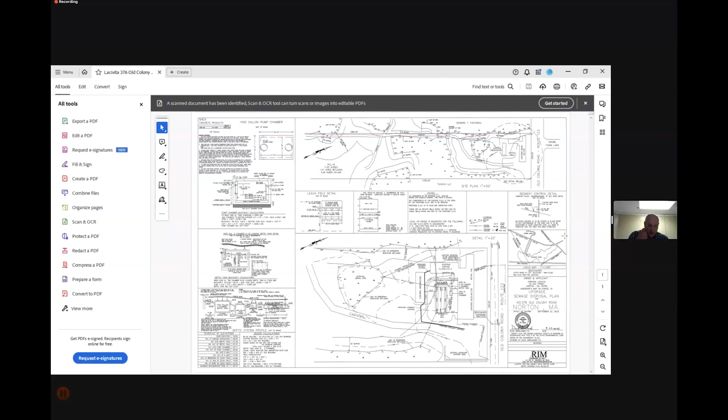I'll zoom into where the existing cesspool is, which is on the westerly side of the existing building. So this is the existing building here, the retail property.

There's a cesspool here with the bordering vegetated wetland on the northwest side, as well as wetlands on the east side, and a potential vernal pool that hasn't been inspected yet but is definitely wetlands at the least. Unfortunately, the building is too close to the road to put a septic system in front.

We have the existing building, an old garage that's still standing, and an existing greenhouse, and we're placing the septic system in between. It keeps us over 50 feet from all wetlands, 68.7 from this one, 70.8, and 102 feet from the potential vernal pool with the leaching area.

It will be a pump system because we did find high groundwater here.

The Board of Health agent has reviewed the plan. He gave me a verbal okay, but I don't believe he's actually approved the plan formally. I have not heard back from him on that, but he has looked it over with me and gave a verbal approval of the location and the design of the system.

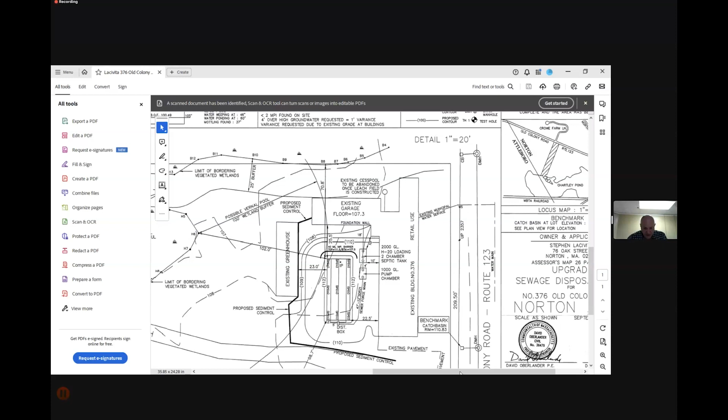That's with, as I said, the high groundwater we found there. The system itself is... trying to find the size of it.

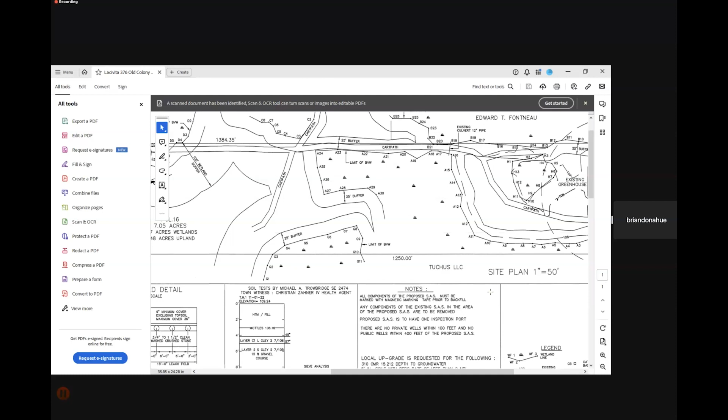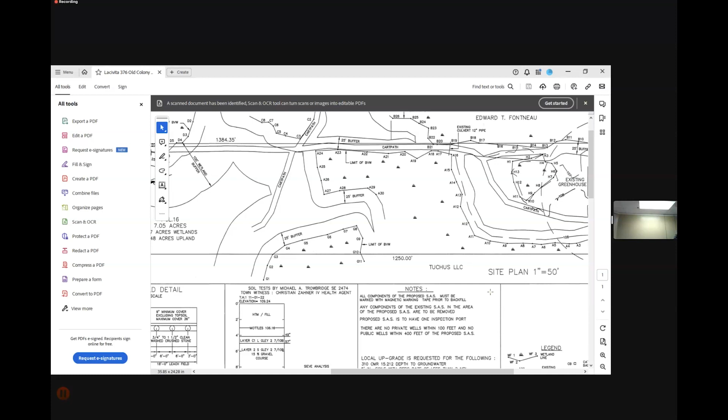So you're raising it up 3 feet, is that what you're doing, Craig? Yeah, over the system, we're raising up 3 feet, then grading down at a 3 to 1 slope. So presumably less than 100 cubic yards, you think? Oh yeah, definitely.

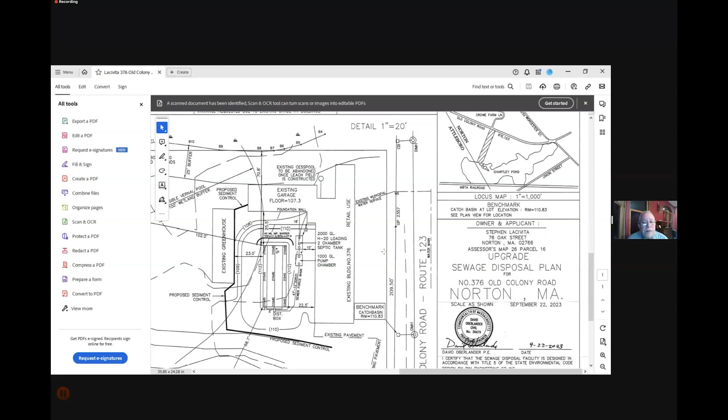Any commission members have any questions? And anyone in the audience have any questions, you can either speak up or press the hand reaction button, or raise your hand.

But this is a pretty straightforward repair, and I don't see any problems with it. Do you have any specific comments, John, or are we all set with this?

No, this is just more administrative. They could have done an emergency repair through the Board of Health, but instead I suggested they come in front of us with this plan. So they've done the process. They've actually gone above and beyond, because this basically would not pass Title V, so they had to do this regardless.

Again, this is Brian Donahue. John has been very cooperative, and I appreciate him and his guidance in staying with the committee. We thought it was best to be transparent with everyone, so you're fully aware of what actions we took with the cesspool versus contained septic tank. Again, I appreciate yourself, John, and the board for hearing us.

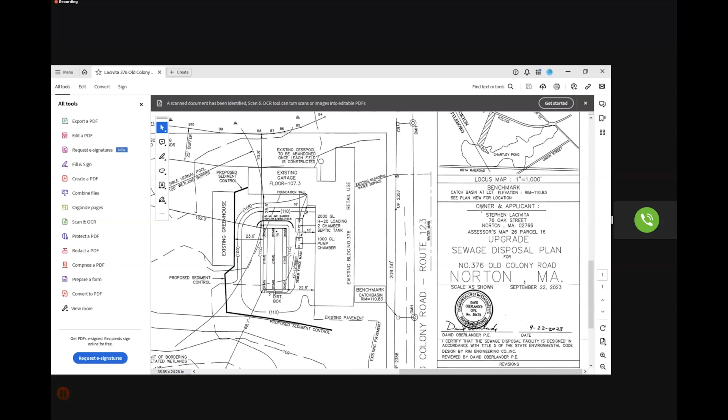Well, this is a pretty common issue in the town of Norton where the water table is frequently high. So I think this is a request for determination. We will likely be issuing a negative determination, which means you proceed with the project. You do not have to file a notice of intent, assuming it's done according to plan.

So I think at this point, unless there are further questions, we can consider a motion to close this public hearing. I would make that motion. Motion made by Tama and seconded by Mark.

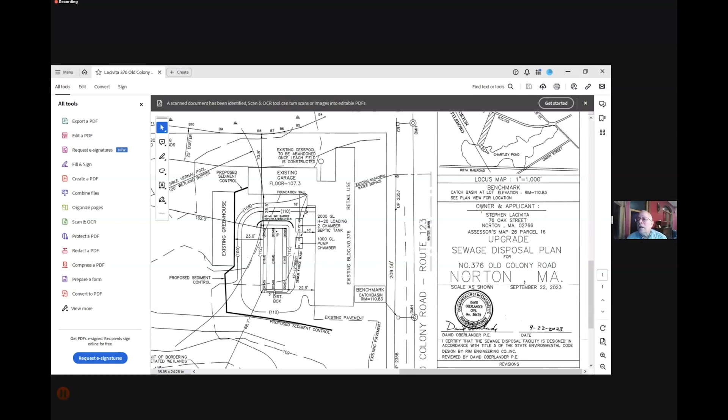Roll call vote. Beginning with Tama and Paxton. Aye. And Mark, and I'll throw in an aye in the process. Aye. And we have Dan. Aye. Got him. All right, so the motion carries.

We also have Ron O'Reilly joining us. So Dan, you can make a note of that in the minutes. Okay, so Ron, did you hear that whole hearing? Oh, I had trouble getting on.

Okay, well, so we won't ask you to throw in a vote, but we now can do a quick vote on the request for determination itself. As I said, this likely can be a negative-3, assuming it's built according to plan.

Do we need a motion for that? I'm happy to do. Okay, we do. I will make that motion. And we'll need a second. Second. We have a motion made by Tama and seconded by Mark for a negative determination.

We will do a roll call vote, starting with Mark and Tama, aye. And Dan and Paxton, yes. Okay, and I'll throw in an aye, so the motion carries. That's a negative determination. Thank you, Craig, and was it Brian? Brian, yes sir, thank you.

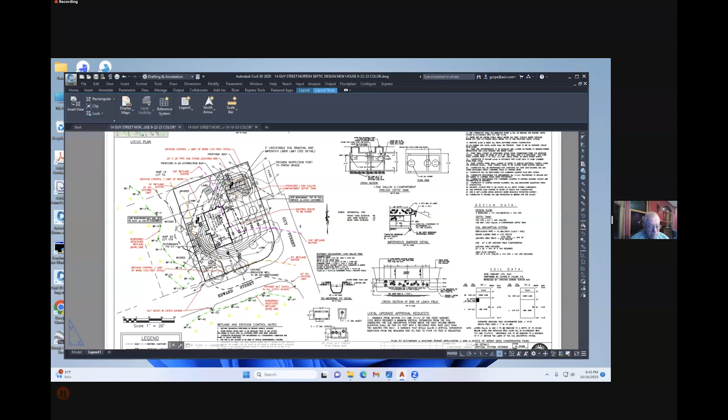All right. And can everybody see the plan? We can. Maybe enlarging it a little would be good. So, this is a demolition and reconstruction

at 14 Guy Street. The existing house is shown as the dashed line. It's a front-to-back split type of house, and it's up on a mound. The water table is fairly close to the surface, and this house being demolished most likely already has water problems in the basement.

We need to keep our new foundation at least 1.5 feet above the observed water elevation. That's what determined the grades on the site, as well as the septic. We have wetlands to the west, mostly created by a low point in Edward Street with these catch basins. We have wetlands to the south across Edward Street, so the 50-foot buffer is shown in orange, and it cuts across like this. The 100-foot buffer is shown in purple or magenta, and it cuts through like this.

What we're proposing is a septic system in the very northeast corner of the site, completely outside the 100-foot buffer. All the components and the septic system itself will be outside the 100-foot buffer. You can see it's kind of a raised system. We have an elevation of 54 here, and an elevation of 51 at the street, so it will be a raised elevation due to the water tables.

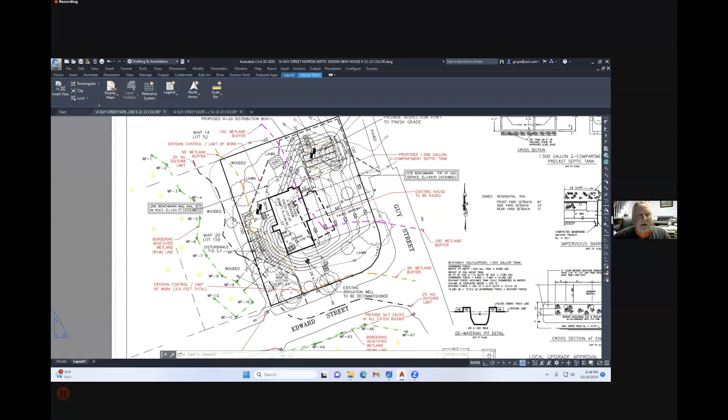Now, I don't show the elevation of the existing house, but it was at elevation 55, and we're bringing our top of foundation to 57.25. So we're raising the top of foundation a little over 2 feet to keep the basement out of the water.

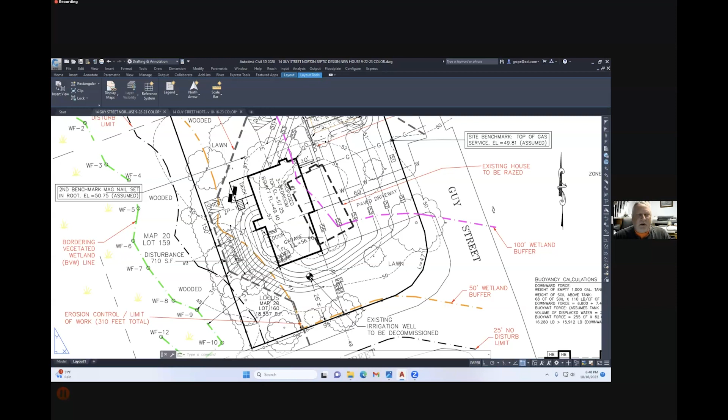When we bring a driveway up here, this is a 10-to-1 slope, so for every 10 feet you go up the driveway, it raises 1 foot. It's a very doable slope, a nice slope into a garage. And we have a lot of grading, another 1.5 feet of grading on top of what's actually there out in the field to bring it in around the house.

Now, I talked to Mr. Thomas earlier today, and he suggested, and I confirmed it through Brian the town administrator, that if the entrance is on Guy Street, then that is the offset for the frontage, and Edward Street would be the sideline offset. So there is a possibility to move the house forward and move the house over.

I actually did that today to see what the effects would be. This is not on your plan, but I added it just to show the effects. Right now, we have a disturbance of 710 feet inside the 50-foot buffer, and our silt fence is about 31 feet from the line. Being that I'd like to keep the silt fence around the container so we can move that and stabilize any earthwork it creates.

We're still going to be 31 feet from the container, but moving this house toward Edward Street brings it actually closer to the 50-foot buffer. I can't really move it forward — I tried moving it forward to the 40-foot offset of Guy Street, and it creates a driveway twice as steep as this, which is unobtainable. You can't maintain it, and it's a danger — it would be an ice danger.

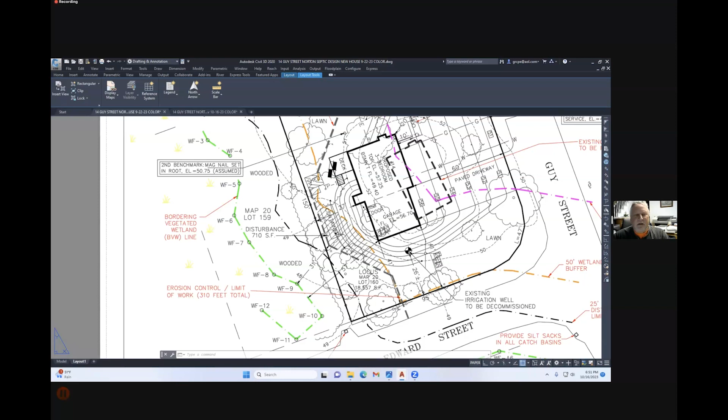Just to get the grading around the corner of the building. So because the 50 shoots out on that end, and the slope of the driveway and the water table, this is actually the least disturbance to the 50 and the wetland area, as opposed to moving it forward.

And I'll leave that up to the commission—we can move it forward if the commission requires us to. I think that this is a better layout with less disturbance than moving it forward and over towards Edward Street.

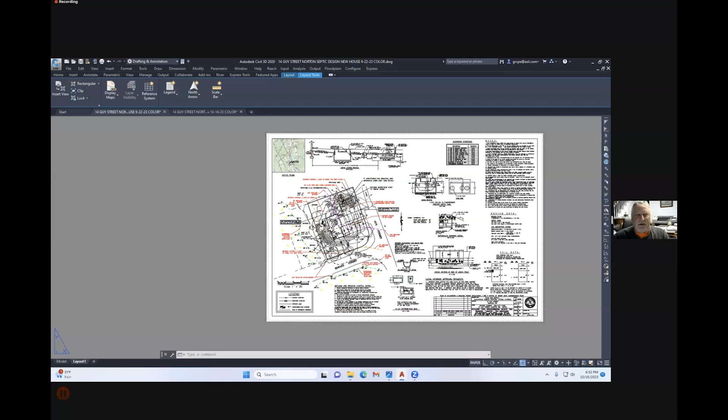So I guess that's it. The erosion control line will be... I don't think we showed a detail for the erosion control on the site. We'll have to add a detail. We normally use a straw wattle staked in around the site, but we could put whatever the commission requires.

So I can answer any questions the commission may have, and the Board of Health, I believe, is reviewing it. I don't believe that they've approved it.

Were you requested to move the house? We weren't requested, but John asked me to look at it to see why we had moved the house. I was under the impression at first that we were required to have the 40-foot off both streets. So that's why I set it up this way.

But Brian confirmed that we don't. When I did move the house closer to Edward Street, there was more of an impact to the 50-foot buffer and more of an impact to the existing trees that are there.

Yeah, well, you're staying outside the 25, which is kind of an absolute for us. But I mean, John, do you want to weigh in about the issue of moving the house?

Personally, I think the idea of causing a steeper driveway is a problem. Yeah, I mean, that obviously wasn't part of the analysis that I did. I just see a footprint, and if you move it to the east, it's less impact within the buffer. So on paper, that would be what we'd want to see.

But if it doesn't work out with all the other safety concerns, and it's more of a hazard for potential winter conditions, then I would suggest safety is a number one priority, and the commission can allow for work within the buffer. Well, I would be concerned about de-icing materials being used, particularly with a steeper driveway. Hopefully the gentle slope will mean there won't be that much need for that kind of thing.

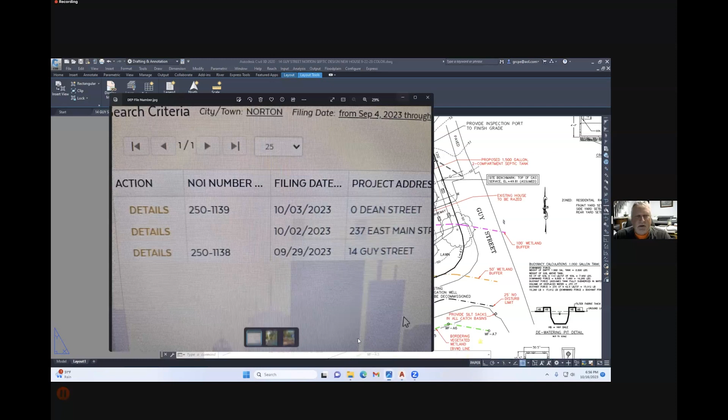So this looks like a notice of intent. John, I assume all the information necessary for closing this is now available. Is that your sense? Yes, we did receive a DEP number for this. I can't remember what it is off the top of my head, but I checked - I think it's 250-1138. I have a picture of it if you want to see it. Yes, 1138.

So we have everything right else administratively, to my knowledge. So we should be all set. But we don't have an order yet, right? And our next meeting's 11/13. I haven't drafted up an order for this one yet. Well, we can't close it because it's going to be beyond the 21-day window. So we're going to continue it and issue at the next meeting.

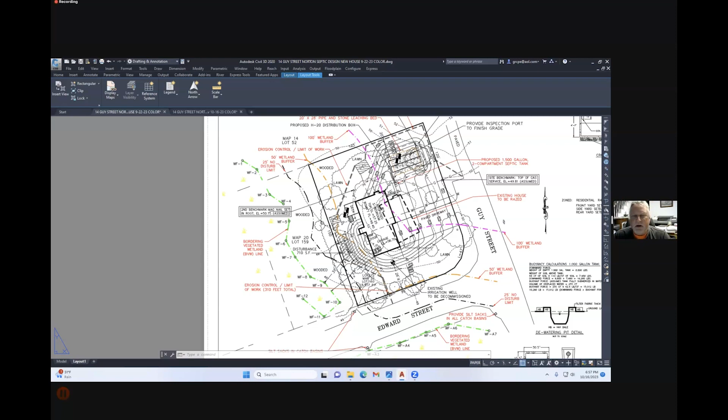David, I don't know if you understand the fine point there - we need to continue this until the next meeting, and then we would issue the orders of conditions at that time. Is that something you understand? Do we close the hearing tonight and start the 21-day appeal period? We can't, because we have 21 days to issue an order, otherwise basically you can go to DEP and just do the project.

So we don't want that to happen. So for this instance, we would have to wait until the next meeting and then issue the order the same night, and then the 10-day appeal period starts. But this is fairly straightforward, so there's no real issue, it's just procedural.

So with that, I think we are ready for a motion to continue this hearing until the 13th of November. Mr. Chairman, I make a motion to continue the hearing on file 250-1138 until November 13th. So we need a second for the motion to continue.

So we have a motion made by Dan, seconded by Tama, roll call vote starting with Mark and Paxton - aye. Tama and Dan - aye. And Ron - that looked like an aye. Why don't you just do a thumbs up there, Ron? Okay, we got a thumbs up, and I'll throw in an aye, so the motion carries.

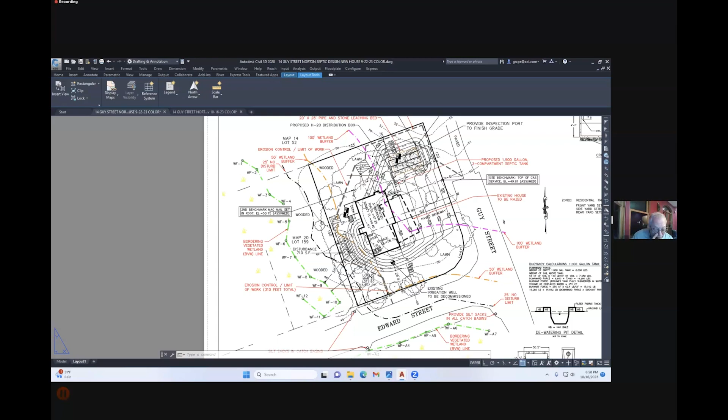This hearing is continued until November 13th, at which time we will issue an order of conditions. All right, thank you, have a good night.

The next item is file number 250-1139, 0 Dean Street. It is a proposed project to verify resource areas and construct a 4-lot residential subdivision off Dean Street with a total of 8 residences. Do we have a representative of the applicant?

Yes, we do, Mr. Chairman. For the record, Eric Dias, registered professional engineer with Strong Point Engineering. You probably have screen sharing capabilities, if you can bring up a plan. Yes, sir. It's loading right now, and everybody should be able to see that. We do, and if you can just make it a little bigger, it'll be easier. Absolutely, how's that? That looks good.

Okay, what I'll do, Mr. Chairman, if it's all right with you, I'll give just a brief overview of the project to set the context, and then I'll get into exactly why we're here with regard to wetlands and buffer zone impacts and things like that.

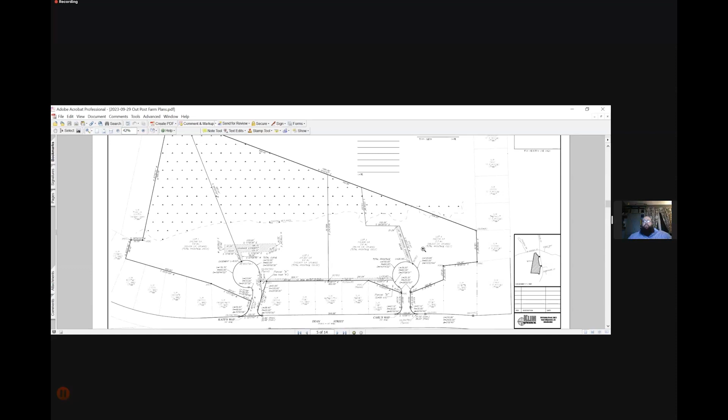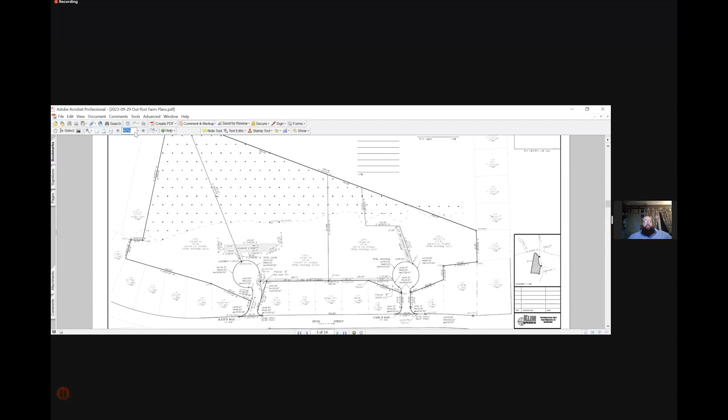So the proposed project is 1, 2, 3, 4 lots, all conforming to zoning. In order to access those lots, we are proposing a small cul-de-sac connecting to Dean Street to provide frontage to these lots. Now, all of the roadway construction is outside of the buffer zone areas, which is very good. In fact, the only place we get into the buffer zone areas is with a stormwater discharge from this particular street here. So I'm going to scroll through the plan set and bring you to that so I can show you what I'm referring to.

If I can find it. Of course, this goes slow when I need it. So let me just zoom in here on this one.

So this is what we are referring to as Kate's Way, on the southern side of the property, the southernmost proposed roadway. What you can see here is that we have kept the limit of disturbance for all of the proposed work associated with the roadway, stormwater depression, houses, lawns, everything outside of the 100-foot buffer zone. Obviously, as we go through this, these houses and lot development characteristics are subject to change to some degree based on the final house selection.

For example, we're proposing duplexes at this time. That does require a special permit from the planning board, which we are before tomorrow night. So if for some reason that special permit wasn't granted, some of these layouts may change, but I bring that up to say that in the event that the eventual lot construction would encroach within the buffer zone, that would be a separate notice of intent filing for that individual lot at that time. So just to simplify, our intent tonight is roadways, infrastructure, and what's associated with that.

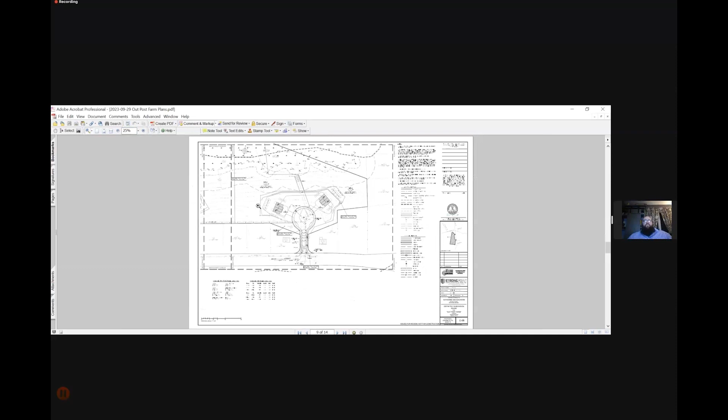I'm going to go to the other road, which we are proposing as Carl's Way. Let me zoom in a little bit so you can see that. This is the road on the northerly side of the site. Again, proposing a couple of duplexes. We have kept all of our lot grading and everything outside of the 100-foot buffer zone, with the exception of this little leg that you see here.

This is the outlet to a subsurface infiltration system that is located under the proposed roadway. The only reason we're bringing it back this far is because that's where we need to go to make our grading work, so we can daylight the pipe.

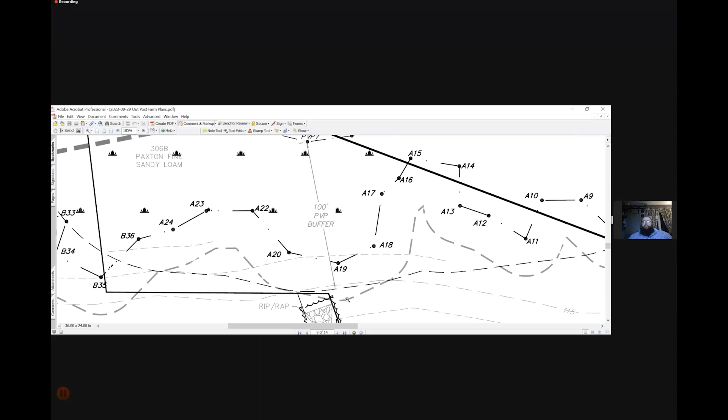The other thing that you will see, and I mentioned this before, this is where it comes into play: right here on this plan, we have the delineated limits of the potential vernal pool, and the 100-foot buffer zone comes to here, and you can see that we've kept our discharge outside of that 100-foot buffer zone to the vernal pool. We've also kept our discharges outside of the 25-foot buffer zone to the wetland. Again, this is the only place on the project that we are proposing to encroach within the buffer zone, is this location here.

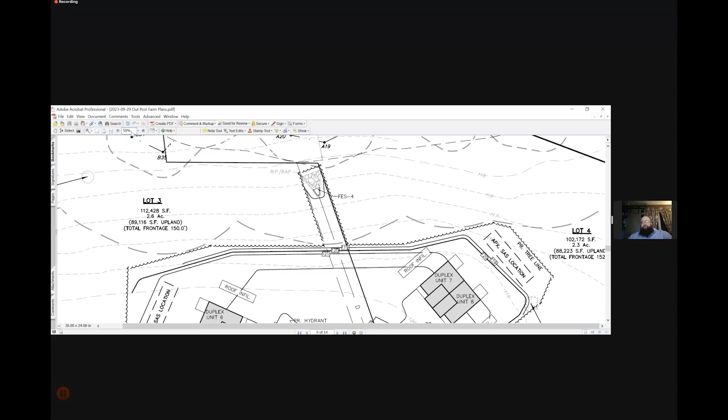I believe, and I might as well comment on this, that you folks hold a stormwater permit for a project of this nature. Just a couple of notes on the stormwater design: we have proposed infiltration throughout, so the roads both grade to flow toward Dean Street because the higher point of the property is back here in both cases on both roads. Both roads are equipped with catch basins at the throat, at the property line.

They have a water quality treatment unit before going into an underground infiltration facility to secure the required groundwater recharge. Further back on the roadway, each cul-de-sac has a catch basin in the middle that again is a water quality unit, which discharges to an underground infiltration system, which then discharges along the natural flow path.

Each house is proposed, and there is notation on the plan, and we would expect that it would likely be a condition in an order of conditions, to be equipped with its own rooftop infiltration system that will accommodate a 100-year storm event, to make sure that we are getting the water back into the ground. Furthermore, the reason we do it that way at this point is because, should the eventual house design change, then that system would change with it. So we leave that to be a little bit flexible.

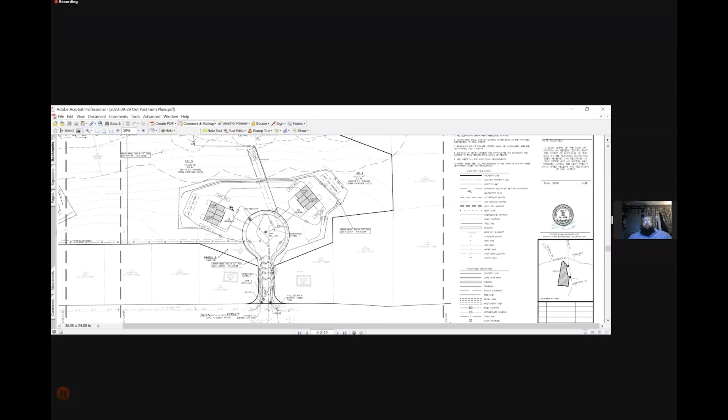Aside from that, we do have a letter from Pat Brennan, who is your review engineer, who reviewed the stormwater on this. He had a couple of minor conditions of approval that he recommended, which we don't take exception to. Other than that, I think you'll find it's a pretty clean peer review letter. Obviously the other thing we were before you with for this is confirmation of the wetland delineation. I do not know at this point if your agent has had an opportunity to do that, but I trust John is always very, very good at what he does, and I'm sure we will have no issues with that. So that is the overall presentation. I'm glad to take any questions you folks have.

I can confirm that I didn't need to change any flags out here, and I do agree that the area you've identified as a potential vernal pool looks like it may be a certified vernal pool. So I appreciate you putting that 100-foot buffer on there in anticipation that it would be considered a certified vernal pool.

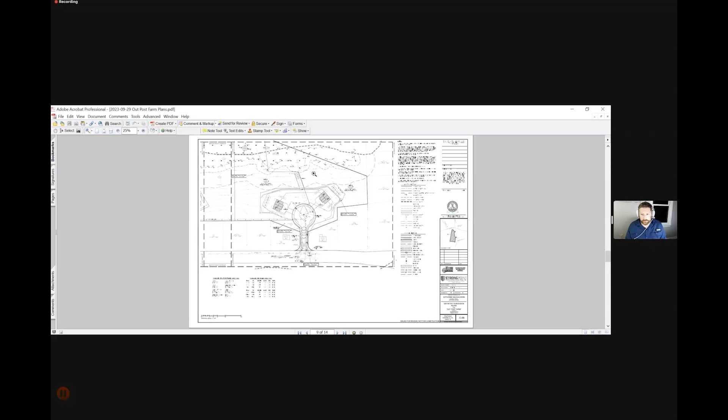So roughly, you're saying the entry roads slope up to a gentle mound, which then slopes down to the wetland in the back. Roughly how high above Dean Street is that cul-de-sac area? My grade down here on Dean Street, interpolating as we go - I've got an elevation of roughly 116 on this road at the connection to Dean Street, and I'm at 121 up at the cul-de-sac. So that's about a 5-foot climb there.

What I will say as well is that if you look, this contour where my mouse is, 121, runs right through this existing 121 contour. So we are matching grades here appropriately. We're not grading off of the site or anything like that.

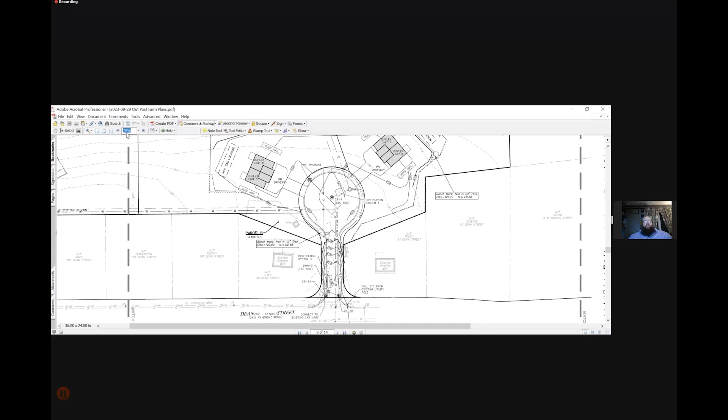Let me go back to the prior page to show the same basic thing. This road has a little bit of a curve in it just to accommodate some encroachments on the property, but again we're at 120 at the cul-de-sac and closer to 116 down here at the road, so about a 4-foot grade change. On my existing conditions plan, I'm running a 120 contour right through the middle of this, so again we're matching grades pretty reasonably.

So it's a very gentle slope then. It is gentle, yes - all of the proposed slopes through this area are no more than 3 to 1. The other thing I should mention is that we did test pits out here, a number of them, basically in all the locations of our proposed stormwater mitigation areas. We had good favorable results, actually better than expected, deeper groundwater elevations than expected, so everything worked out very well for us.

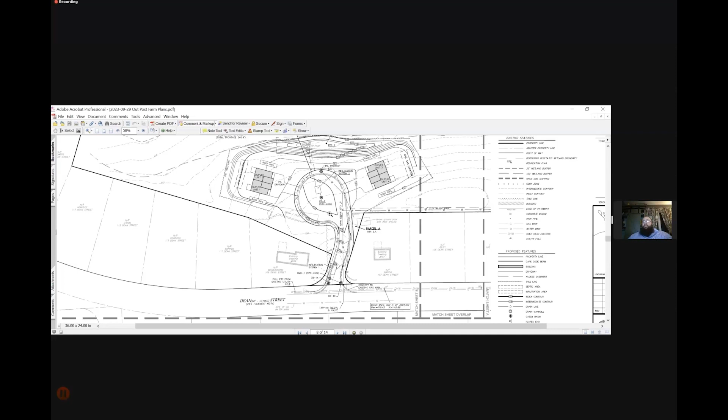All right, any further questions from members of the commission or members of the audience? We have a number, and with regard to buffer work, it's pretty limited.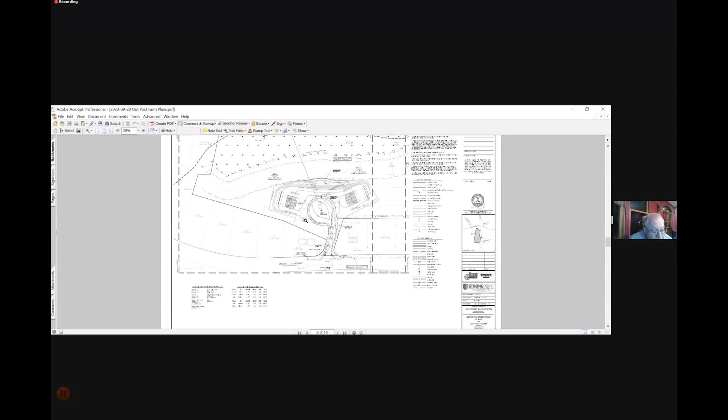John, I'm assuming this can be continued with the possibility of orders of conditions - this is all one project, right? So it'll be a single order of condition. Yeah, this is all one project, it's not split. So what we can do is I can request a continuance from the applicant, and then draft up an order potentially to be issued at the next meeting. That will give them enough time if there's any changes with planning to revise the plans as well.

All right, but this is fairly straightforward - I wouldn't anticipate much in the way of changes with planning. Is that right? Yeah, I don't know, it's not my purview or our purview. It's up for planning to decide on what they think is adequate for this project, but I will say, for conservation, I don't see an issue with this project.

If I could just shed some light on that - we did submit the planning application a day before this one, so they've all had it for the same amount of time, and we've got no comments back from anybody but the water department, which I'm going to take as no news being good news at this point. So even if there were some changes to be made, I don't think there's anything that really dramatically impacts buffer zone impacts or stormwater design at this point.

All right, so unless there are further questions, we can consider a motion to continue this hearing until November 13th. So moved.

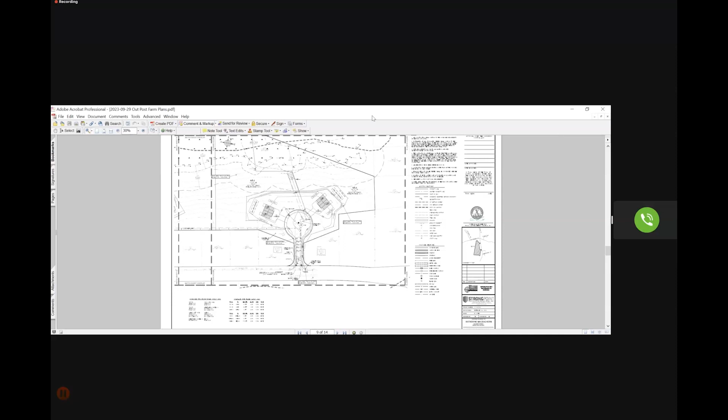Motion by Dan, seconded by Tama. Roll call vote, starting with Tama and Paxton - aye. Ron and Mark - aye. Dan - aye, and myself, I'll throw in an aye. So the motion carries. This hearing will be taken up again on 11/13, but likely just to close and issue an order.